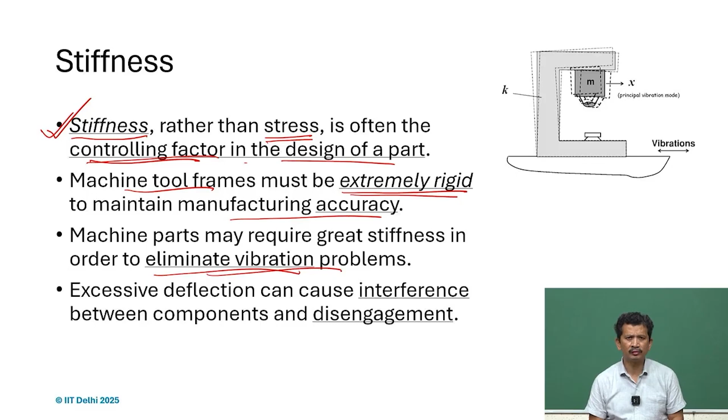As we discussed earlier, if you see machine tool frames, we want to make them extremely rigid so that we can achieve high accuracies. Also, we want to eliminate vibration issues, and that is why we want very high stiffness in most of the parts we design.

But we also understand that since stiffness is related to deflections, if these deflections are very high, if there is excessive deflection in any component or part, there can be a lot of interference between the components, and at the same time there can be disengagement as well.

For instance, think of a gear assembly on a shaft. If there is a lot of deflection because of the loading, we will have a lot of noise because the gears are either interfering or disengaging, and it will even cause a lot of problems on the bearings.

So it is very important to understand that of course the stresses are important, we do not want the parts to fail, but at the same time when it comes to the performance while it is working, it is very important to take care of the stiffness part.

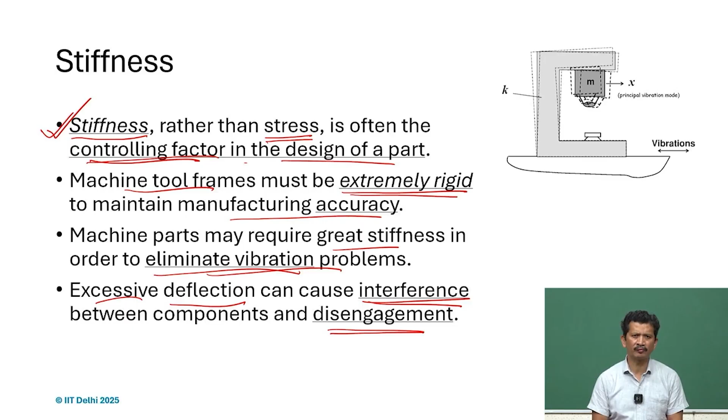What we also try to learn in this course is when you talk about stiffness, many times we talk about springs, and very often what comes to mind are helical springs, torsional springs, or leaf springs. These are very typical shapes or elements used in conventional design.

But when we talk about stiffnesses, any component, any geometry in the machine, depending on the loading conditions and what kind of loading it experiences, will have deflections defined accordingly. So it is important to understand what kind of loading and deflections we are talking about, within the elastic range.

For instance, if we talk about the first part, a prismatic bar or any mechanical component, and the loads are in tension, it is a tensile load, so it is in the axial direction.

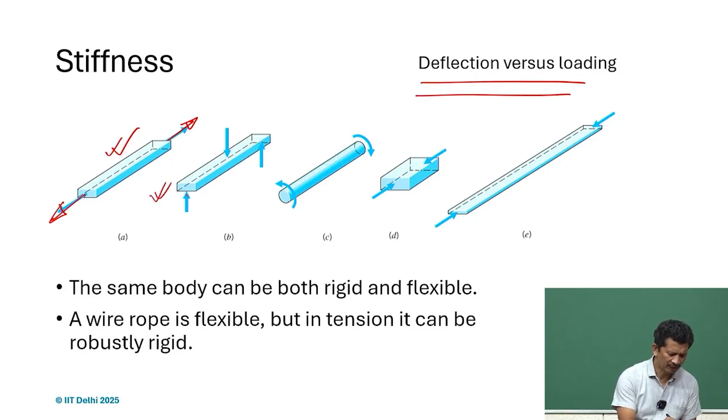The same member can also undergo a bending load. It is supported here and there might be a load acting at the middle. This is a different kind of loading, generally referred to as bending load, and it will deform under bending.

If we take this bar and there is a twisting action, there is a torsional load trying to twist it, so it will also undergo deflection, there will be a twist. So there will be torsional load acting, and accordingly we define torsional stiffness.

We can also have axial loading but in compression, a smaller bar, or a thin structure undergoing compression. Under tension we may not have a problem, but under axial compression, if the cross sections are very small and slender, we also face problems with stability, and we have to take care of buckling or warping in 2D cases.

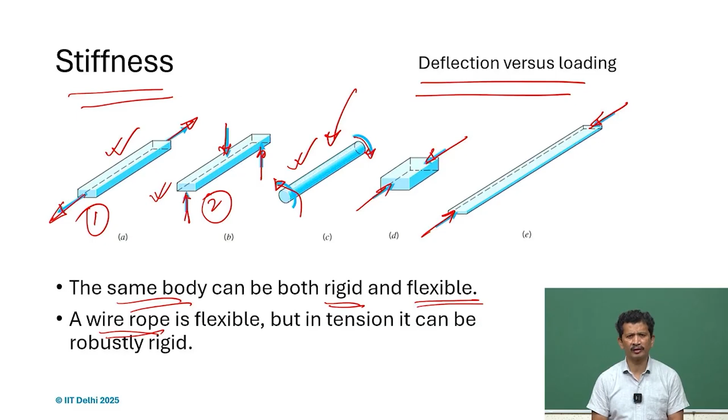But under bending load or torsional load it might be limited and can be flexible. For instance, if we take a wire rope, cables, these days we also use them for transmissions over long distances, for instance elevators, even surgical instruments like Da Vinci have cable transmission. They use wire ropes so that all the actuators can be base mounted and you are still able to control the manipulator at the end.

What is good about this is these cables can be very flexible. Flexible in what sense? The torsional stiffness is very small. So any wire, if we take, torsional stiffness is very flexible. Of course bending also, it can flex very easily, can bend very easily, but if we apply load in tension, what we realize is that it is very stiff, and that is the reason.

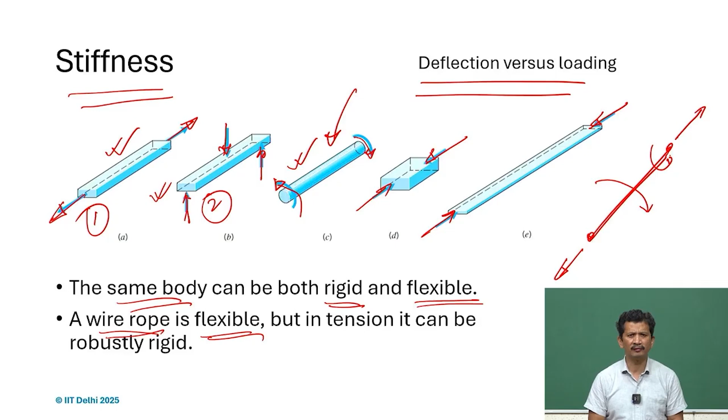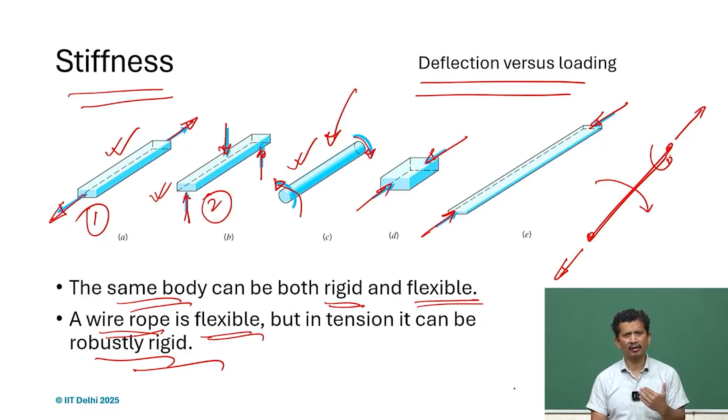But we see in any hoisting application or crane, any big object we want to move, we see these wire ropes everywhere, because in one direction, the axial direction, in tension, they provide very good stiffness, very good rigidity, but at the same time they can be flexible. During the course, we understand that if we choose these elements and place them properly, we can make a very rigid and very stiff design out of it. So, just keep in mind that stiffness is not just an overall phenomenon, but it's limited to how we are applying the load and what are the associated deformations, and accordingly we will talk about different stiffnesses.

So, we will just go back and try to revise some of the things. Very simple, but may be very important for this course. For instance, if you are talking about stiffness and only talking about axially loaded members, it can be a prismatic member or a bar.

So, if we take this element and apply load F, here it's in compression, but it can be in tension. What will be the extension or contraction when it undergoes tension or compression, and delta is the deflection. If there is a compressive load, there will be contraction, but if it's in tension, there will be extension. What is that deflection?

You may find it little difficult to remember: FL divided by EA. E is Young's modulus and A is the area of cross section. L is the length, and this is the area of cross section we are talking about. Material property is your E, Young's modulus. So a very easy way to remember is...

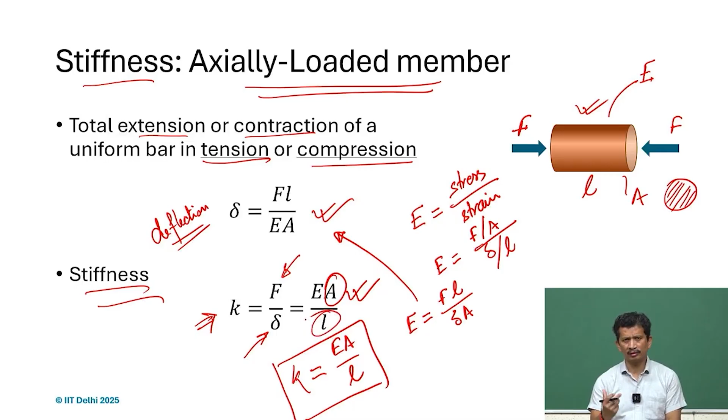But when we talk about the geometry, what we realize is that the larger the area of cross section, the larger the stiffness, but when it comes to L, shorter is better in terms of stiffness, the longer the length, the stiffness will get reduced. So, very easy to remember, K, the stiffness of a bar undergoing tension or compression, is given by EA upon L.

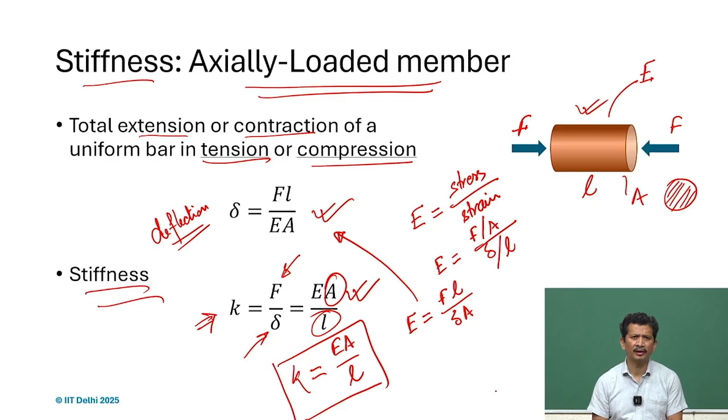Similarly, what happens if the member is loaded in torsion? If there is a torque T acting, a torsional load, and we have this circular bar of length L and area of cross section A, but in general what we will see is the diameter, and one important thing will be the J value, that is the polar moment of inertia.

And in this case we can also derive it similarly, talking about the modulus of rigidity and the stress over strain, and then if we rearrange we can arrive at the angular deflection. As we wrote for axial deformations, similarly for rotation we can just replace with the rotational parameters. So F will be replaced by T, the torsional load or torque, length stays, and E value will be replaced by G, the modulus of rigidity, and the A value, the area of cross section important in axial load, will in this case be the polar moment of inertia J.

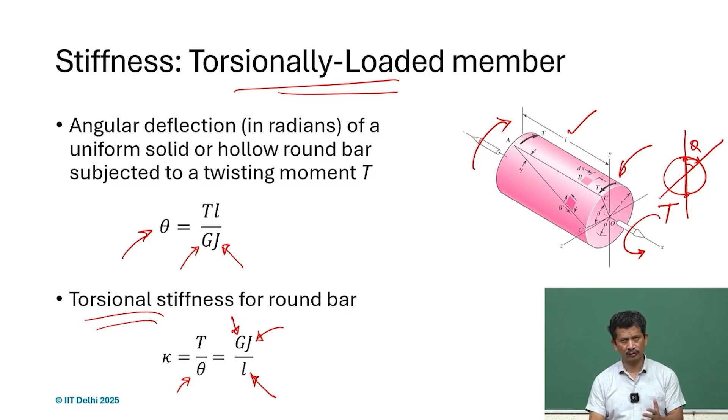What happens in bending? If you want to talk about stiffness in bending, it's not so straightforward, because we need to understand what kind of bending loads are there, how the beam is supported, how it's defined, what kind of loading is coming on it, and depending on that we will have different kinds of deflections. So we will go through some simple examples, and it will be clear.

Most of the time we will be talking about a cantilever kind of setup, and if there is a load F acting at the end, there will be associated deflections. Usually how we proceed is we try to find the bending moment at some section, and that is related by M over EI equals d2y by dx squared. So that is how the loading and deformation are related.

So we start with the bending moment equations, and we integrate, we can find the angular deflections theta, and we integrate further, and then we can find deflections at different points. Of course, we have to apply different boundary conditions, and we can find the appropriate integrating constants.

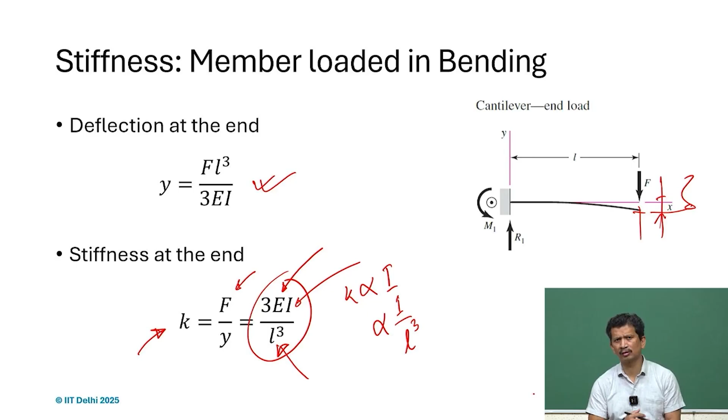Suppose if we take the same cantilever and we only apply the bending moment, pure bending moment, what happens? Again we start with the similar approach. We write in terms of M and theta and y, we integrate and we find these things, and for this case, here the bending moment is constant over the length. We integrate and we can find theta. So this is the theta we are talking about, at the tip, where we are applying it, how it will bend.

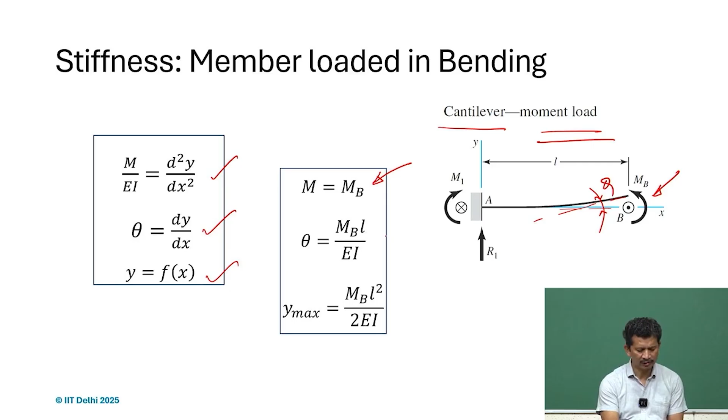So there will be angular deflection, and this is the theta, which is written as MBL by EI, and accordingly what we will also find is that the tip will also deflect. So it is not just the angular deformation, but also there is a linear deformation. If you apply the bending moment, it also deflects. We have to realize that, and many times when we write in terms of matrices, we realize that the linear and angular parameters are related, and that is how we also get off diagonal terms when we write in terms of matrices.

So in this case, suppose if we write and compare this one with respect to theta, the associated deflection here, angular deflection will be given by ML by EI, and the rotational stiffness kappa, which is defined as M over theta, so this is EI by L. I think again very simple, very easy to remember. So whenever there is a cantilever and pure bending moment is applied, what happens? What is the rotational stiffness?

So it is simply EI, the flexural rigidity, many times we call it, because it's the combined E and I value together, it gives the flexural rigidity, the rigidity in bending, and that is why it is called flexural rigidity many times. So over L. So always remember, if it is a cantilever and pure bending load is applied, bending moment is applied, the rotational stiffness is given by EI by L.

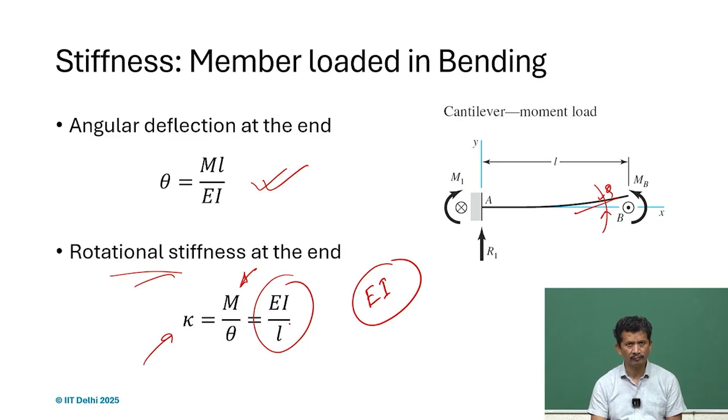So, we may like to summarize here all the cases frequently used in this course. We are not going for very complex formulations, but simple formulations, easy to use, what we might have studied in first and second year of mechanical engineering, or if you are not from mechanical engineering, you can easily refer to any mechanics book and it's easy to understand.

So, if it's any member in tension or compression, load is applied and there will be associated deflection delta, and this is the stiffness K, P over delta, and area of cross section A, E, divided by L, overall length.

So, what we realize is that when we put these values and choose the right material, for instance mild steel or stainless steel for these flexible cables, most of the time we use, and for normal engineering applications usually we use steel, and E is pretty high for that. In most cases even a small area of cross section can give us very good stiffness over the length also.

That is why we always say try to design so that the loading coming on the members is always in axial direction, either in compression or tension, and tension is much better. In compression we also have to look at the buckling phenomena, the instability we are talking about. Otherwise, if it is in tension, it may not be a problem, and that is one of the areas, like tensegrity, that is how it is designed.

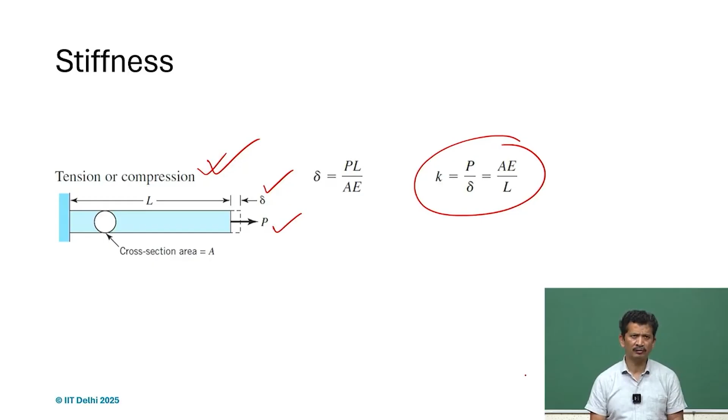So, all the tension structures, tension members, are made of very flexible cables and wires, and all the compressive members can be huge blocks. But then you can design very good structures. Even these days exoskeletons are designed based on that, because it takes a very small volume and a lot of space around to put things, and lots of designs like space deployable structures for moving things without occluding the space. It's very nice. So tension is always preferred, tensile members or axial members, I would say.

If it is in torsion, this is what we have: K prime G by L. K prime actually is J when it comes to round sections, round bars, but for some different sections, not symmetric, it will have different values. So be aware of that, and we can always refer to catalogs or handbooks to get those numbers. So K prime G divided by L.

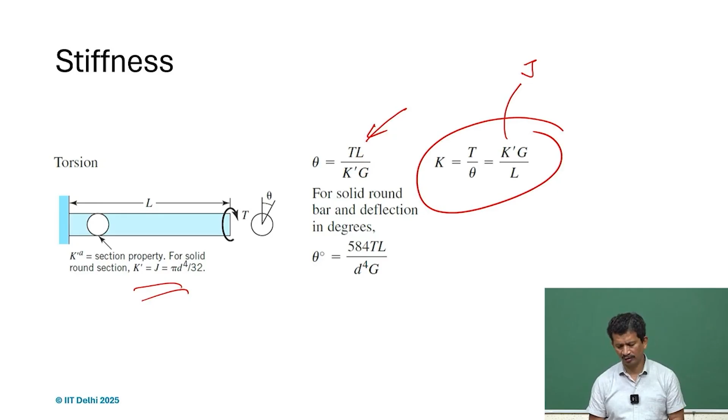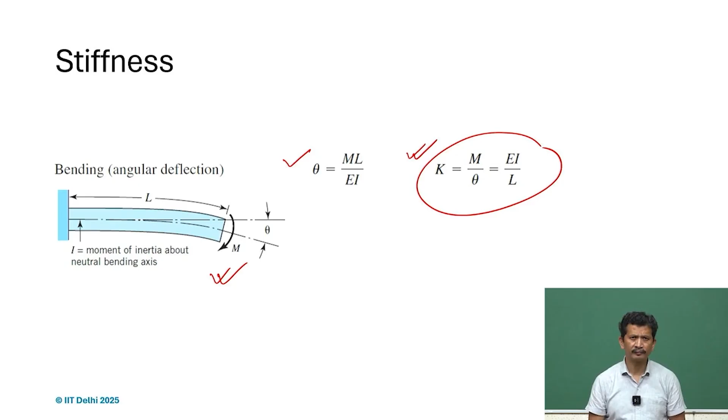Yes, bending for different cases will have a different formulation, and we have to check. For simple cases, if we are simply applying a bending moment, the associated deflection is theta, and this is the rotational stiffness. So you apply the bending moment, and K is simply E I by L, relatable to other cases.

But what if we are applying a point load at the end, and there will be deflection in that direction? Accordingly we can define K, and here it will be 3 E I by L cubed. So this is something to remember, or make a note of it.

I just want to highlight here that in axial direction or in torsion, things may be straightforward, and we can just remember those formulas and refer to them. But when it comes to bending, I am trying to emphasize that you must look at the boundary condition, how it is loaded. It can be a cantilever, a fixed end, or simply supported, and accordingly these stiffnesses will be different. So in case of bending, you have to look at the construction and boundary conditions, how they are joined, how they are connected to other parts, or how they are moving, so that we do not make mistakes in calculating the stiffness values.

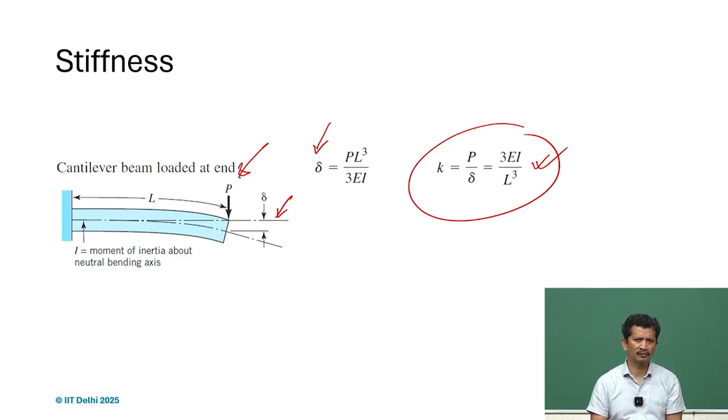Very important parameter here, and we usually do not cover this in our curriculum, UG curriculum, or even otherwise. But what we realized is that this transmission ratio has a lot of impact on the overall stiffness, and we try to understand with a very simple example.

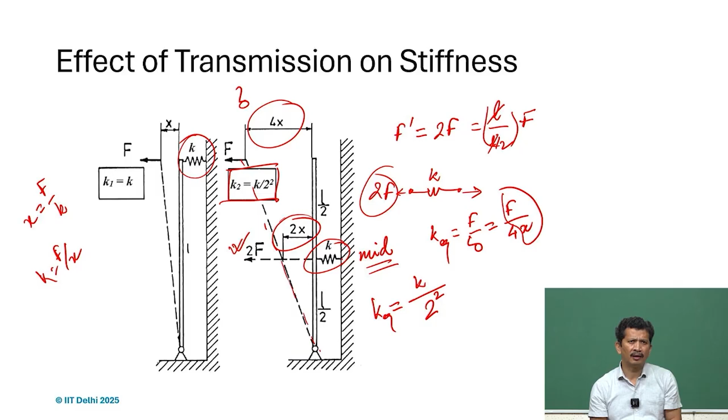So, placing any member, or any stiff or compliant member having value K, will have a lot of effect on the equivalent stiffness, and this is one example to illustrate that. So, we can write it in terms of the transmission ratio also.

So, if we write transmission ratio as I, which is V out by V in. V in is with respect to where we are placing the component, and V out is the point of interest where we are applying the force or getting the output. Here the ratio will definitely be 2 in this case, and if we generalize, we see that if I is the transmission ratio, the equivalent stiffness will be K over I square.

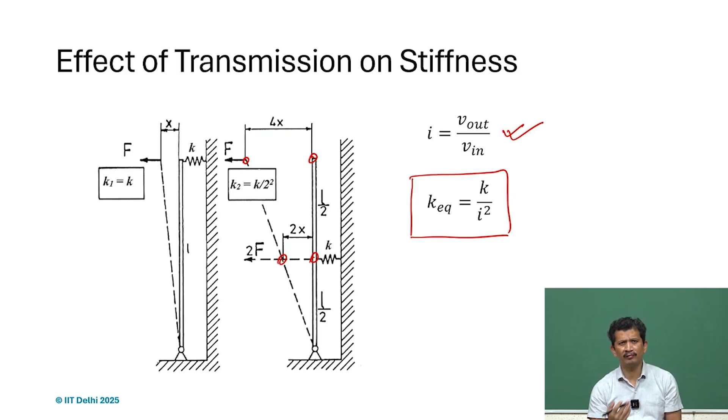So, huge impact on the stiffness, and if we know this, we will also try to see in the design what happens. Just moving the spring can affect the overall performance. If K equivalent is different, all the vibration requirements, your omega 0 values, will all get affected because of that. And if we know this, I think by now we should be able to appreciate why certain phenomena or things happen that were not expected earlier. Thank you.